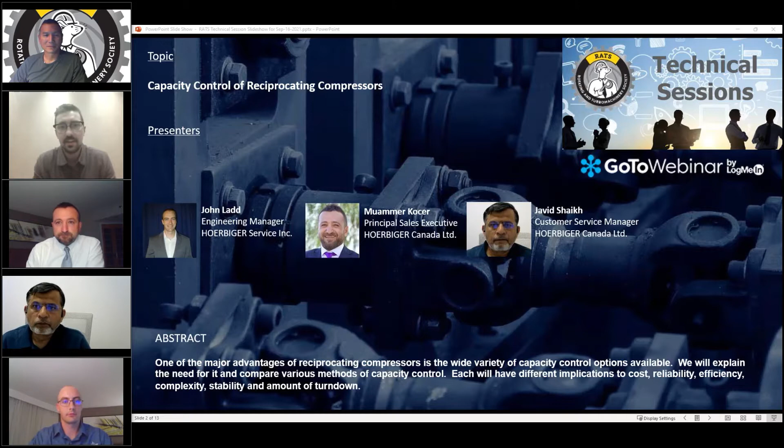Thanks, John. All right, well Javid, thank you very much. Let's see, all right. Is my screen coming through?

To kick off the presentation, just to recap for why we need capacity control on compressors, and some of the working theory behind how they actually move gas. As we all know, reciprocating compressors are positive displacement machines, meaning they will move as much gas as you feed them. And oftentimes the downstream process doesn't require the full capacity of the compressor, so we need a means to turn it down or regulate the amount of flow going to it.

Some additional reasons that we need capacity control on compressors: sometimes we want to save energy, sometimes we want to prevent the driver from exceeding its power limit. This is fairly common in the midstream side of the industry. Then if your suction pressure and your discharge pressures are changing, then obviously your interstage pressures will change, and you need some form of capacity control to keep everything balanced. If you have side streams in your process, it's a very similar reason to needing to balance your interstage pressures. And it's also very common in midstream that you want to keep your driver torque within a fixed band. This is of particular importance when you have a natural gas driver, and they perform best when they are in their ideal torque band.

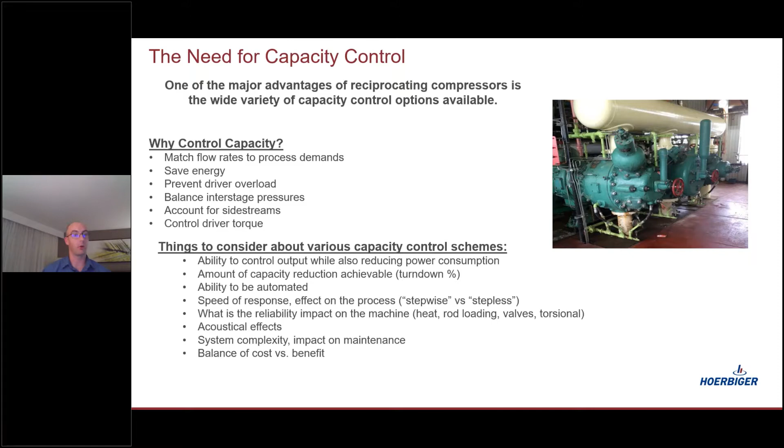So throughout this presentation, we'll go over some things that you should consider over the various capacity control methods. That's the ability to actually turn down the compressor, how much turn down you need, how easy it is to automate a certain type of capacity control, how quickly do you need it to respond, and then what are the reliability impacts of implementing such a system, whether it's heating, the rod loads, the valves, are there any acoustical issues, are there any torsional issues? And then we obviously want a system that is able to do everything we need, but we also don't want it to break the bank.

So we have this slide here just to go over how the mass flow of a compressor is calculated. These are the 4 knobs that we can turn if we want to adjust the flow rate through a cylinder. The first knob that we can turn is adjusting the speed of the compressor. If you speed it up, you're obviously going to pump more gas. If you slow it down, you'll pump less gas.

Then the next term we have is the suction gas density. This is directly proportional to your suction gas pressure. If you have greater suction gas density, it means you have more molecules in the same amount of space. And because these are positive displacement machines, it's going to move those molecules down the line. Then next, you have your swept volume, which is your bore area times your stroke.

And then finally, we have this last term, which is the volumetric efficiency term. All this term means is it is the percentage of the stroke that your suction valves are open. So for this particular PV card we are seeing here, between V2 and V1, that is 100% of your stroke. And from B to C, that is your volumetric efficiency. For this example curve, we're probably looking at 80 to 85% volumetric efficiency. And this term is calculated by these parameters down here: your clearance volume, your compression ratio, and your kappa, also known as the isentropic exponent.

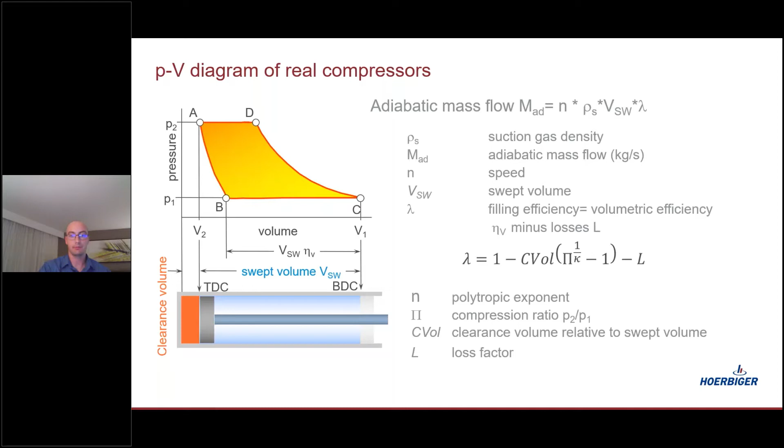As we had touched on in the first slide, one of the reasons for the need for capacity control is we want to make sure our drivers remain within their power limit. This is the formula that we use to calculate the required power. The area inside the PV curve is the work being done on the gas, and this equation here just converts that work into a rate. Once we have the rate of work being done, we are then able to get the power demand.

So P, that's the area within the PV card. L is the length of your stroke. A is your piston area. So the L and the A term is your swept volume. And N is your compressor speed. And then this 33,000 is just a constant, and that gets all these funny units to agree with each other.

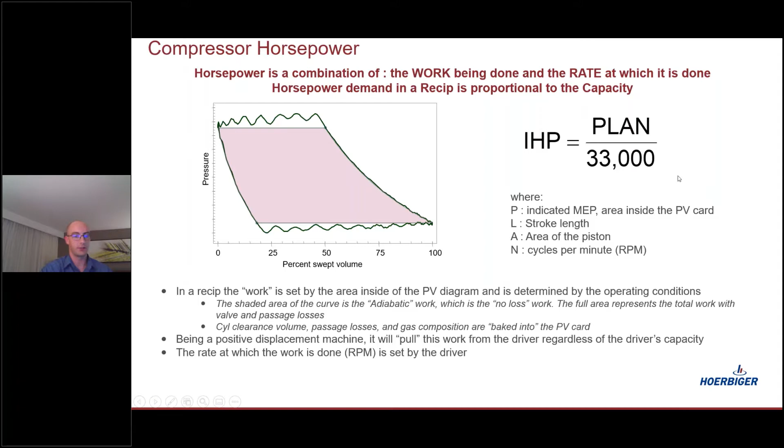Within the world of reciprocating compressor capacity control, there are two main families: stepwise control and stepless capacity control. By stepwise, we mean you have individual load steps. The fewest number of load steps you can have is 2, meaning your compressor can be on or all the way off. From 2, you can have 3, 4, 5, and upwards of 48, if not more, individual load steps. It just depends on how many actuation devices you want to put on your compressor, how many cylinders you have, and the amount of complexity you are willing to tolerate.

The other family of capacity control is stepless capacity control. By stepless, we mean it has an infinite range of capacities, so if your downstream process needs 62.5% of the compressor's flow rate, it will be able to deliver exactly that amount. There are a number of different methods out there to have a stepwise and a stepless capacity control system.

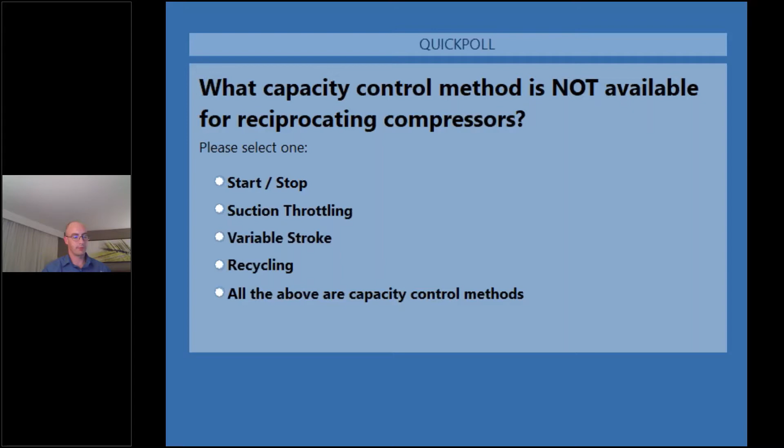Okay, let's take a look here. So 0% on start and stop, 25% suction throttling, 25% variable stroke, 13% recycling, and 38% said all of the above are capacity control methods.

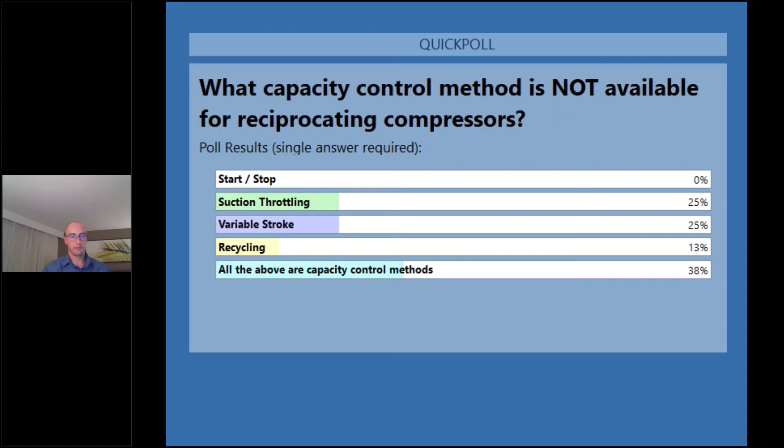Well, so the correct answer was there's no such thing as a variable stroke compressor. The reason for that is the crankshaft is what controls the stroke, and while the compressor is running, that crankshaft has fixed geometry, so we aren't able to adjust the flow through it.

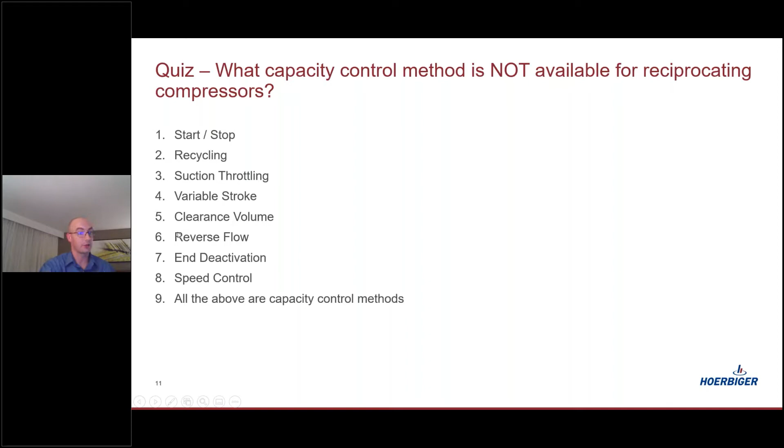Throughout the presentation, we'll go over start-stop control, recycle control, how suction throttling actually works, how you can add or reduce the clearance volume in a cylinder, go over the principles for how reverse flow actuation works, go over cylinder end deactivation and speed control.

We put all these 7 methods on this chart here, showing the 4 parameters that you should consider whenever implementing a capacity control system: the stability of that capacity control system, how much turndown it has, the complexity of implementing such a system, and the efficiency of that system.

To start it off, we'll take a look at the start-stop control. We see that it has very low stability. If you have a 2,000 horsepower compressor and you are starting and stopping it, that will introduce quite a shock to the system. So you'll either pull down your header or pressure up your downstream headers, just from bringing that compressor online and offline.

The start-stop does have fantastic turndown capabilities. Honestly, you can go from full load to 0 load, but there's no intermediate steps. It's very low on the complexity side, you just need the ability to start and stop the compressor with ease. From an efficiency standpoint, when the compressor is offline, it's obviously not consuming any power.

Next is the recycling method. Some people call this the kickback method, the recirc valves, the spillback valve, there's all sorts of names for it. It's a very stable system, a stepless capacity control method, and can have up to 100% turndown. It's not very complex, but the downside is a recycle valve is not very efficient.

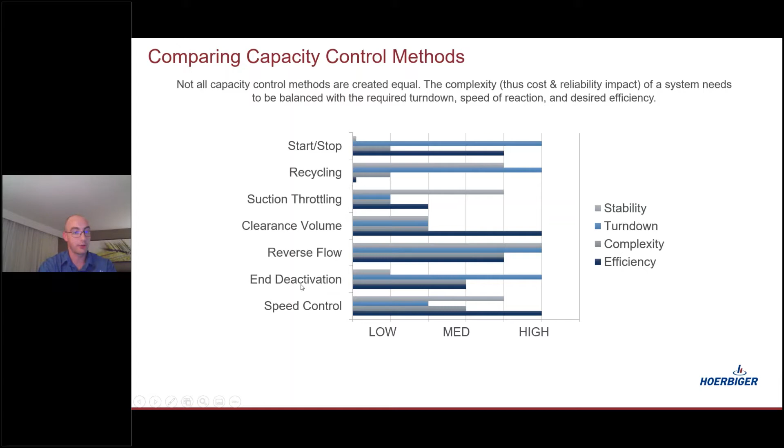The reverse flow actuation type of device, which is what we call our Hydrocom system, is extremely stable. It has a complete turndown range, meaning you go from full load to 0 load. The one downside is it is a fairly complex system, but it is very efficient. And then same story for end deactivation and speed control.

So first we will cover the external methods of capacity control for these compressors. The first method is the spillback control, or the recycle control.

So what this means is that the compressor is at a fixed geometry, meaning it's always going to pump the same amount of gas regardless of what the downstream process needs. So if your downstream process only needs 50% of the compressor's flow rate, it means that 50% of the gas that has been compressed is going to go back through this recycle valve, go back to the suction side, and get recompressed again and again. So as we can see by the simple process flow diagram, it's a very simple system, but it is a very inefficient system because you are continuously doing 100% of the work, regardless of how much gas the downstream process needs.

So if there are any power limitations on the compressor, the spillback valve is not the type of capacity control that can help reduce the power demand effectively.

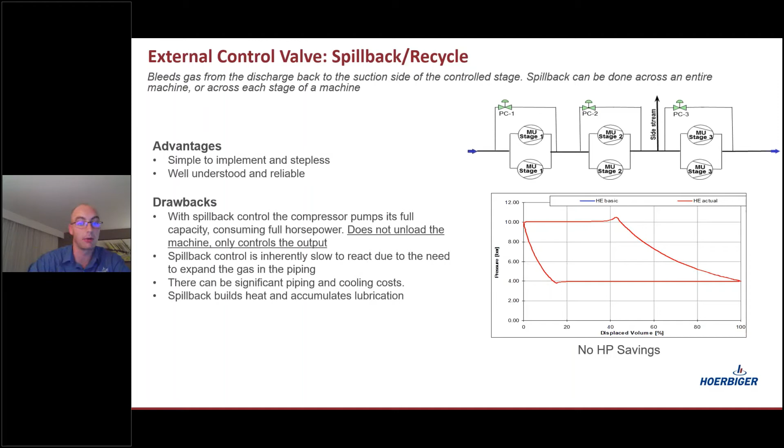Then next is the suction valve throttling method. This is where you allow your suction pressure to increase or decrease depending on the flow demand. If you drop your suction gas pressure, your suction gas density will decrease, which we are seeing on this red curve. By decreasing our suction gas density, we are reducing the amount of molecules that are being pulled into the cylinder. And then the second term that we are affecting in our mass flow equation is we are reducing the volumetric efficiency as well.

So we see on the blue curve, we're probably sitting at an 85% VE. Then on the red curve, we are sitting at probably a 75% VE. So that is another indication that we are pulling less gas into the cylinder. We actually do end up saving a little bit of power doing this, but it is not the most efficient means to reduce the capacity.

The other drawback of using a suction valve throttle is that you increase your compression ratio. And if you increase your compression ratio, then your discharge temperature will also increase.

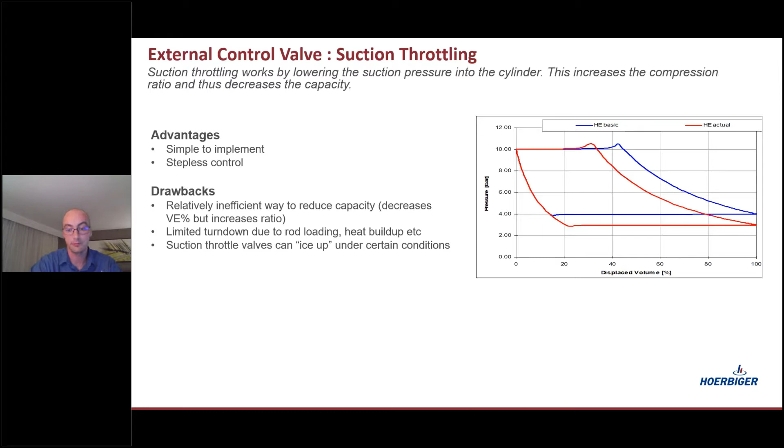So in the downstream world, we don't see very much speed control on reciprocating compressors. Most of these units use a synchronous fixed speed electric motor. So whether it's running at 277 RPM, 300 RPM, 327, 450, whatever that motor is rated for, it's going to continue to spin at that speed, regardless of what the compressor needs.

There are a handful of installations that use a VFD drive. These are very efficient, but the downside of using them is they are extremely expensive and they take up a lot of space. In the midstream side of the world, it is very common for compressors to be driven by a gas engine. These gas engines have a speed range, typically plus or minus 20% of their average speed. So that means you can adjust your capacity by that amount.

The downside of using a variable speed to control the capacity is you may excite a torsional natural frequency in the compressor itself. So oftentimes there are dead bands, meaning you can't run at a certain speed. You have to pass through that band extremely quickly. So it's pseudo stepless, stepless to a point, and then it has to step across that, then it goes back to stepless control.

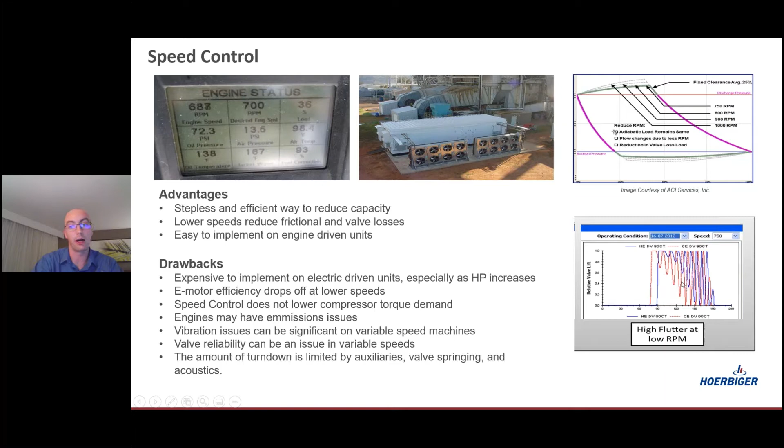All right, so those are the three methods of external capacity control on compressors. If you all have any questions about these systems, please put them in the chat, and we would be happy to address those at the next natural stopping point.

So now we will dive into the capacity control methods that are a part of the compressor itself. The first one is looking at cylinder end deactivation. So we threw a quiz in here just to get an idea of what type of cylinder deactivation y'all's compressors use, whether it's a plug unloader, a suction valve unloader, whether it's finger or needle style. Do you remove the valves when you know you're not going to need capacity for a long period of time? Do you have port unloaders, or do you use a combination of all four of these?

Oh, sorry about that. I've got to get on the ball here.

Okay, so what kind of cylinder deactivation does your compressor use? Please select one: plug unloader, suction valve unloader, finger or needle, valve removal, port unloader, or combination.

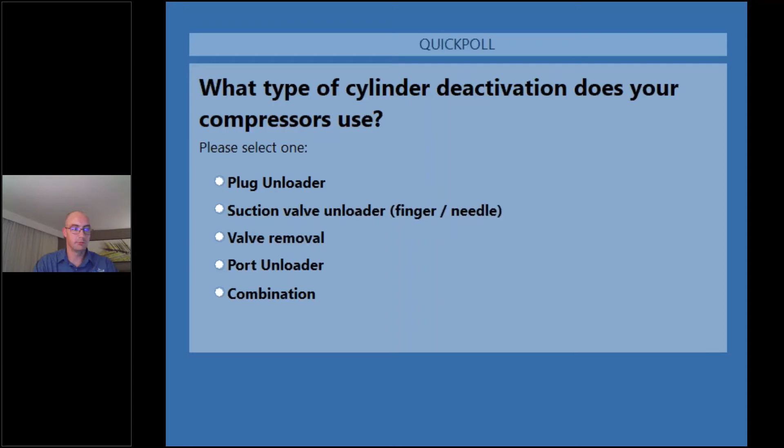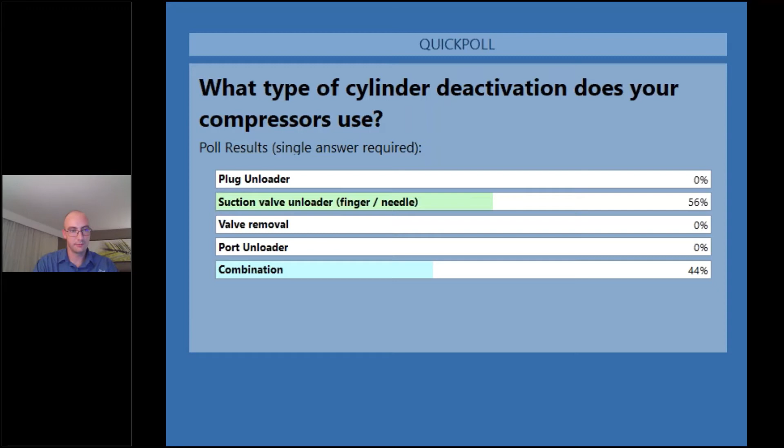So nobody's using plug unloaders, at least on this call anyway. Suction valve unloaders, 56%. Nobody's voted on valve removal or port unloader, and 44% are using a combination. I'd be curious to know what combination you guys are using, feel free to put that in the chat as well. Okay, thank you. Great.

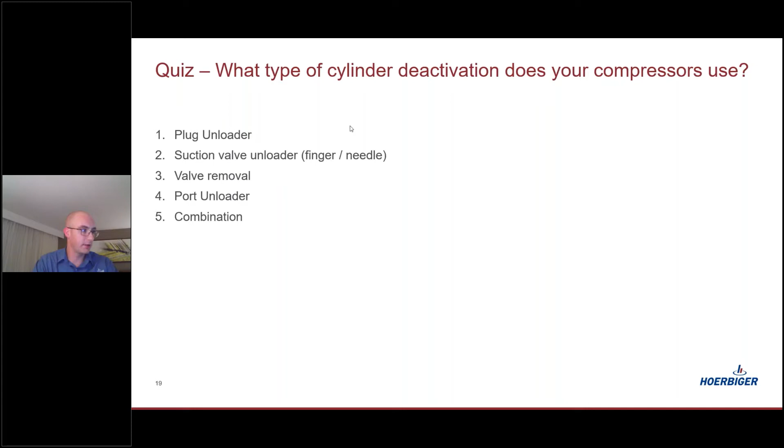Let's move that out of the way. Okay, so now let's dive into the different methods to deactivate the cylinder.

The most common methods out there are to use a plug or a port unloader. These terms are often used interchangeably, but they use the same principle. When the plug is down, it seals this hole, which then prevents gas from flowing back into the suction plenum, allowing the natural compression process to start.

When you have a suction valve with a finger unloader, this is what a typical assembly will look like. You have your actuator on top, bolted onto your valve cover. The cover then pushes on the cage, which then holds the valve in place. This actuator has air pressure on top, and pushes on top of the finger, holding the suction valve in the fully open position.

Here is a snip of a partial valve with a plug unloader. By a partial valve, I mean we have the center of the valve open. That allows the plug to seat on it, sealing the gas inside the chamber, allowing compression to start. Then when the plug is retracted, that port is open, allowing gas to flow freely in and out of the cylinder. So the main benefits of these systems: they're pretty simple to put on a compressor.

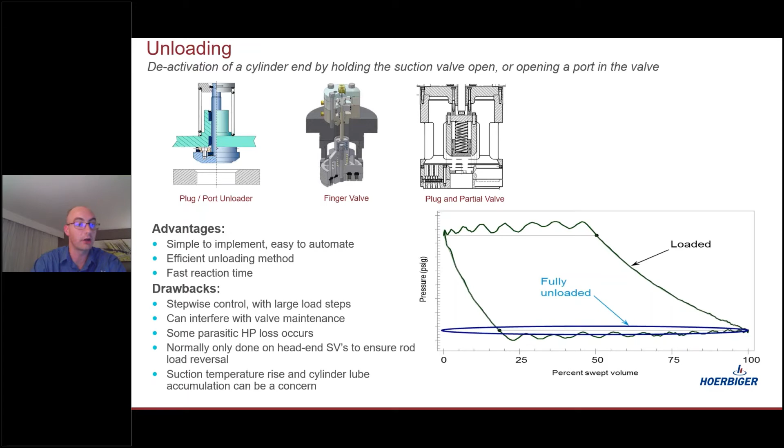It's usually done on the head end side of the cylinder, but it's also very common to have it on the crank end side to assist with the start and stop of the compressor. All right.

So if you have a suction valve with a finger unloader on it, here are some of the design considerations that need to be taken into account. We would need to know the exact operating conditions for that particular compressor, because that will dictate how much backflow force is going across the valve trying to close it.

Because as gas flows from inside the cylinder back to the plenum, there is drag force on the plate or ring or poppet trying to close it, and then your finger or needle assembly is needed to help hold it open. All that back force often tries to bend the plate or the ring or the poppet, and we just need to make sure that the sealing element is strong enough to handle that back force.

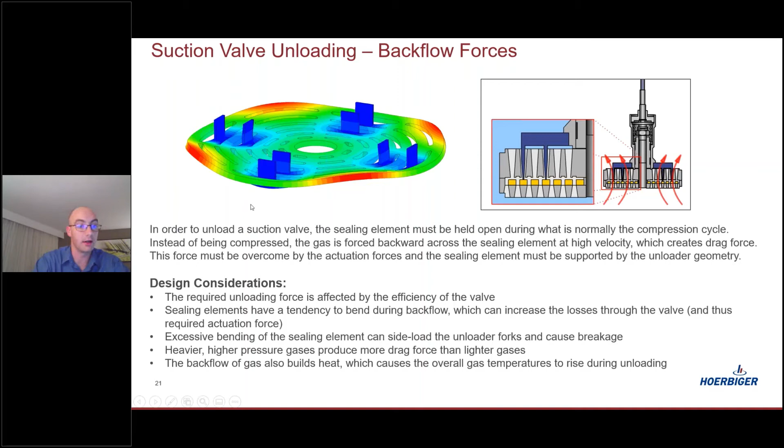We also need to ensure that the fingers are strong enough to be able to hold it down and not be at risk of damage. All right.

So within the world of actuators, there are several different styles out there. On the left-hand side is a stacked piston actuator. The air is delivered on top of this actuator. The air then pushes on top of these pistons, which then pushes the rod down, pushing the finger, holding the finger in the fully open position. This is what we call an air-to-unload style of actuator.

Next there is a diaphragm style, very similar in working principle to the piston. You have air delivered on top. It then works and pressurizes the diaphragm, pushing the rod down, putting the valve in the unload position.

Next is a reverse acting style of actuator, used on suction valves with finger unloader, except it uses a spring force to hold the valve in the fully open position. You deliver air on the backside to counteract that spring force, allowing the suction valve to open and close as a normal suction valve.

Here is a snip of a typical example of a plug unloader, where you deliver air on top, air then presses on the piston, then connects to the rod, and the rod then holds the plug down in the loaded position. This drawing here is actually the top end of this plug unloader. The air pushes down and holds the plug in place, allowing the normal compression process to start.

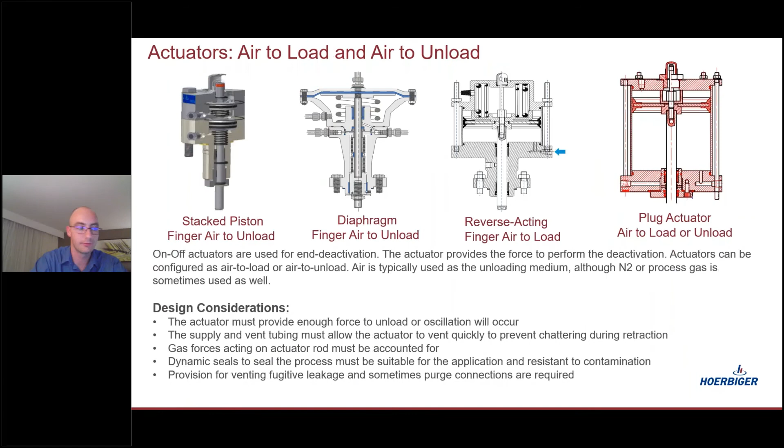For the different types of unloaders out there, you have your plug unloader, which can be used on plate, ring, and poppet valves. Here's your finger style unloader used on plate and ring styles. Here's your pin or needle style that's solely used on poppet valves. And then this unique contraption is a radial poppet valve unloader.

Although these do work, they do become a maintenance headache because it is very difficult to get these poppets clocked in the correct position. So they are very prone to leakage, and it's a giant chunk of metal to be putting in and pulling out of a compressor.

Some of the design considerations, I won't read these for you since y'all will have this presentation for your records. But the key takeaway is you just want to make sure that the material you choose for your unloading device is suitable for the gas that it will be operating in. And we want to make sure that it is designed with adequate strength, so that way we don't see any premature failures.

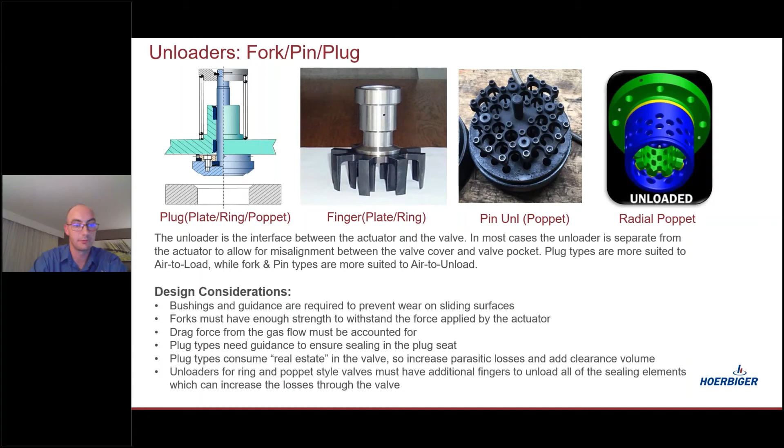So these are the different types of reverse flow control actuators out there. This is a hydraulic system. This is an electric system, which works on the principle of electromagnets. Then here is a hydraulic system, and then here is another hydraulic system. These two in the middle are both HOERBIGER products.

This is the eHydrocom system. It's got two banks of electromagnets that you apply a high voltage to. That voltage then pulls on two magnetic plates, and it works on the same principle as the traditional hydraulic version, which regulates the opening and closing of the suction valves.

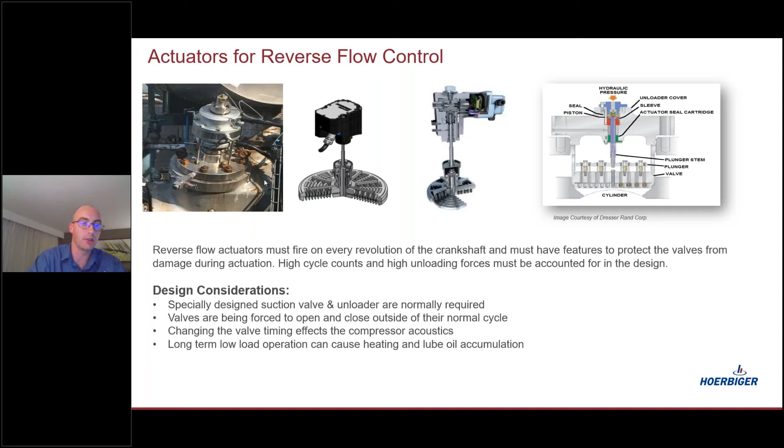We have this chart here going over how it works, but I figure it's way easier to see how it actually works with an animation.

So this is how the hydraulic system works. Right now the compressor is at full load. Here we are at top dead center. Once you are at top dead center, you start backstroke, starting the re-expansion process. Then your suction valves open, you are pulling gas into the chamber until bottom dead center. This is where your suction valves close, and then you restart the compression process. Once you hit this point, your discharge valves open and flow starts moving down the line.

So how this reverse flow actuation device works is it actually controls when the suction valve will close. Once again, we'll start at top dead center, follow the same re-expansion path, follow the same intake path where you get to bottom dead center, except we see that there is hydraulic pressure being delivered to the top of the actuator, holding the suction valve in the open position, allowing gas to escape back into the suction plenum. It then does that until a prescribed time where the hydraulic pressure is released, allowing the suction valve to close, and then the compression process begins, giving you a reduced quantity of gas being discharged. This happens every single cycle of the compressor, allowing you to finely tune the capacity of the unit.

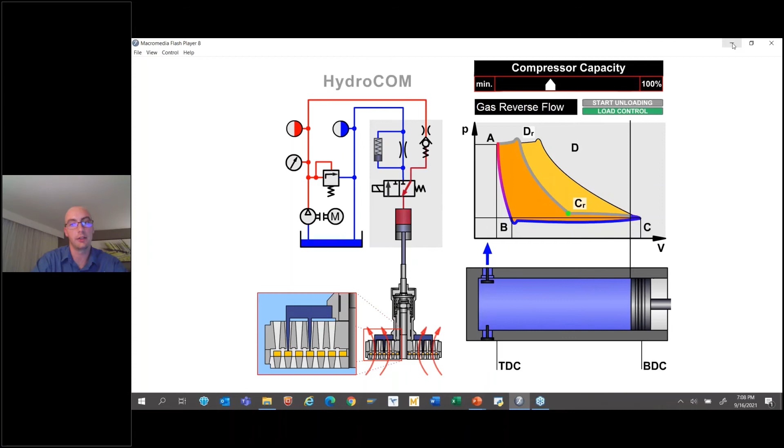Before going on to the typical unloading problems we see, are there any questions about cylinder end deactivation?

Well, we don't see any questions come in at all, but that animation was amazing. I've honestly never really seen the operation of the HydroCOM, and that was great. If there's no questions throughout the presentation, definitely interested in getting them for the end. So just keep your thinking caps on. We've got a poll coming up soon.

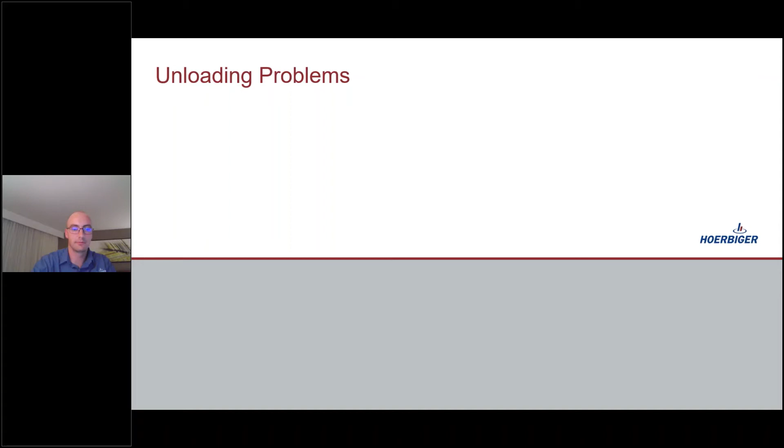What are the common unloader problems? Select all that apply: plug/valve leaking, getting stuck in loaded or unloaded position, component failures. This is a multiple answer, multiple choice question.

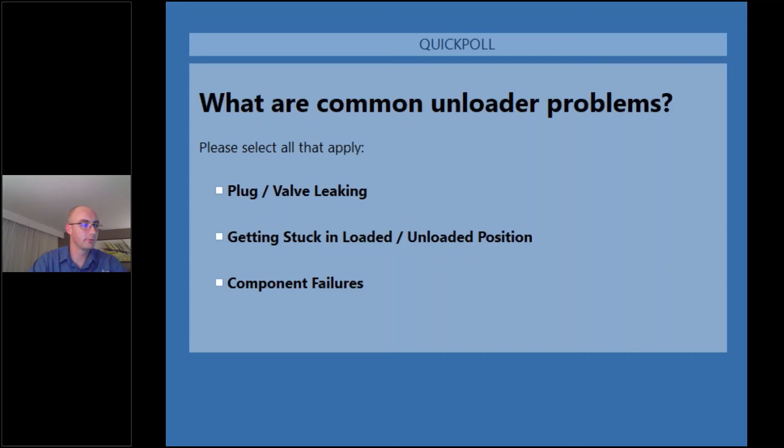Let's see what the percentages are: 80% plug and valve leaking, 60% getting stuck in loaded or unloaded position, and 70% component failures.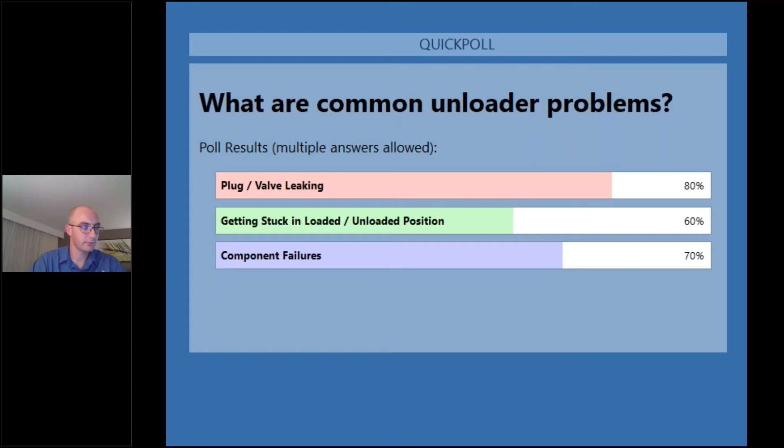It's very common to see all three of those. That was more just to gauge what the biggest pain points are on your on-off unloading systems. Whether it is a plug unloader or a finger unloader, it's very common to suffer from insufficient actuation pressure, meaning there is not enough air to keep the finger or the plug in the down position. When this happens, as gas is backflowing across the finger, it overpowers the available unloading force, causing the finger to lift up. Then it gets a little bit of pressure, closes down, opens up, closes down, opens up, closes down.

By doing that, you will often see damage on the fingers themselves, the plates, rings. If this is happening on a plug unloader, you'll see a lot of wear on the plug as well as the plug seat. And then you may see some damage on the top of the unloader rod or on top of the finger unloader assembly.

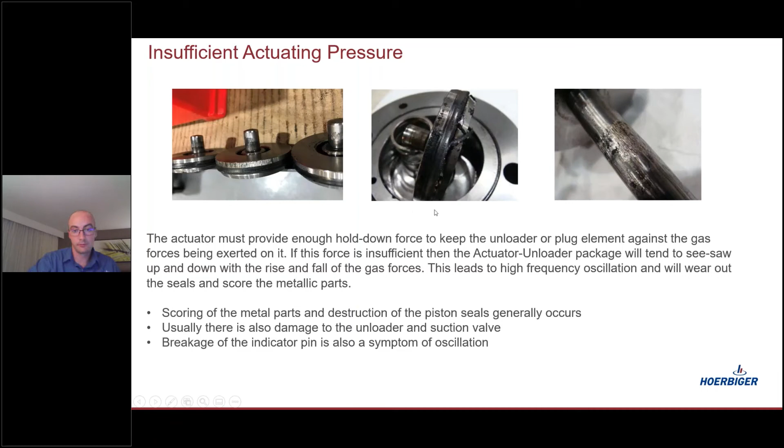Here is an extreme example where the plant had an ample amount of plant air, and in doing so they were putting an excessive amount of air pressure on the finger unloaders. I can't remember exactly, but for this case they were putting like 200, 250 PSI of shop air on the unloading actuator. These unloading actuators are typically designed for 70 to 100 PSI, so they were dramatically exceeding the design factors, and we can see damage on the plates themselves where the fingers will indent into the softer plastic plate material.

If the unloading force is truly excessive, you may buckle the fingers and they will snap off like that, or you may see some damage on these unloader caps as well.

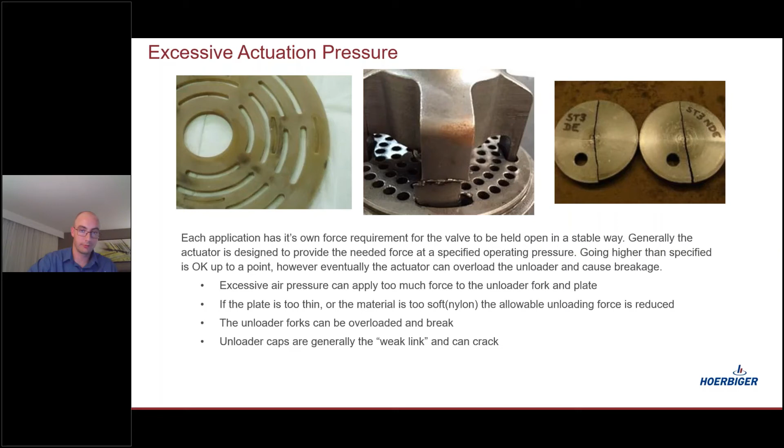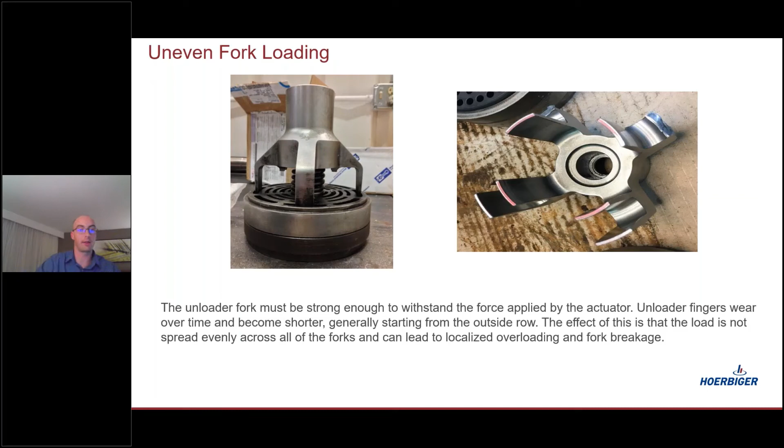This is of particular concern with a finger unloader or needle unloader: you want all your fingers or needles to be on the same plane, meaning you don't want your unloader cocked in the valve or with one leg longer than the other, because that longest leg will press hardest on the valve. That side of the valve will see the most unloading force, and the other side of the plate or ring will flutter back and forth. In doing that, it can damage the plate or ring, or it can also damage the shorter fingers because that side of the plate is continuously whipping back and forth and impacting on it.

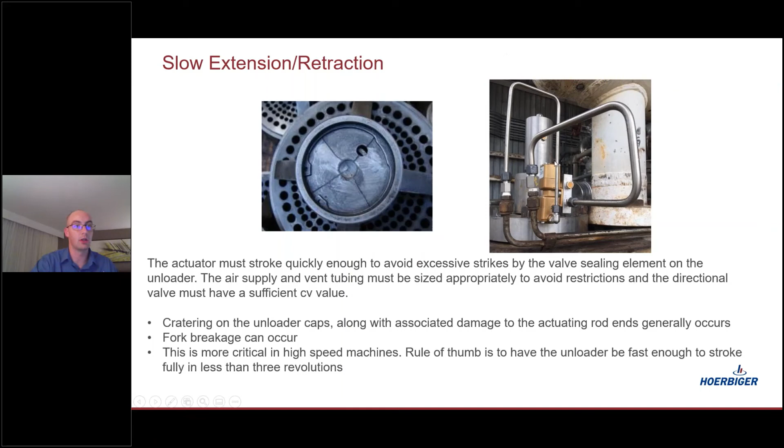Here is an example of what happens if you don't have a quick exhaust valve on the unloading actuators, meaning it traps the supply air inside the actuator and it leaks out very slowly. In doing so, the unloader cap or the unloader rod is retracting very slowly, and it's often getting beat up along the way, and you'll see indentation on your caps like this. You'll see damage on your plug seats. All sorts of problems can be tied back to slow extension or retraction of the actuators.

Here is an extreme example of a plug that has been heavily abused in the field. This is surprisingly common to see because these are heavy devices to pull on and off the compressor. They're often left on the deck while the valves, pistons, and packing are sent to the repair facility, so they don't get a lot of love and attention.

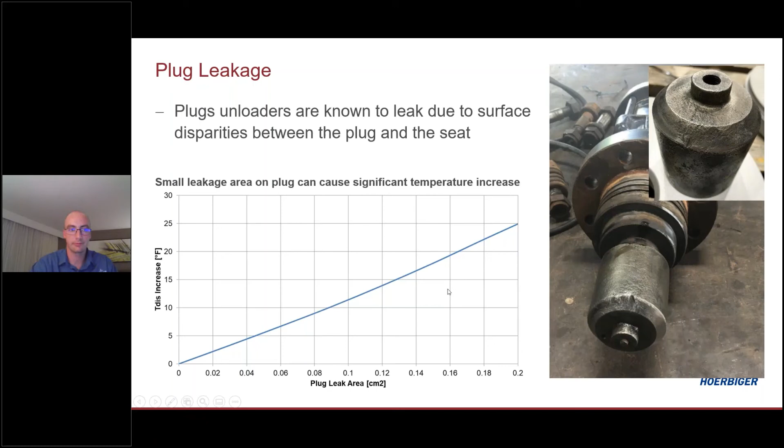As these plugs and plug seats get damaged, you introduce a leak path, and this leak path can result in a dramatic increase in the discharge temperature on the compressor. Even a tiny effective flow area leakage, about 0.1 square centimeters - if you hold your four fingers together and form that little square, that's about 0.1 square centimeters - that small amount of leakage can result in greater than 10 degrees of discharge temperature increase when you have a high kappa gas, typically a gas with a lot of H2 in it. It's fairly common with nitrogen in it as well.

A common complaint we hear from end users is that they experience elevated temperatures when running unloaded for a prolonged period of time. This is just a theory that explains why that is.

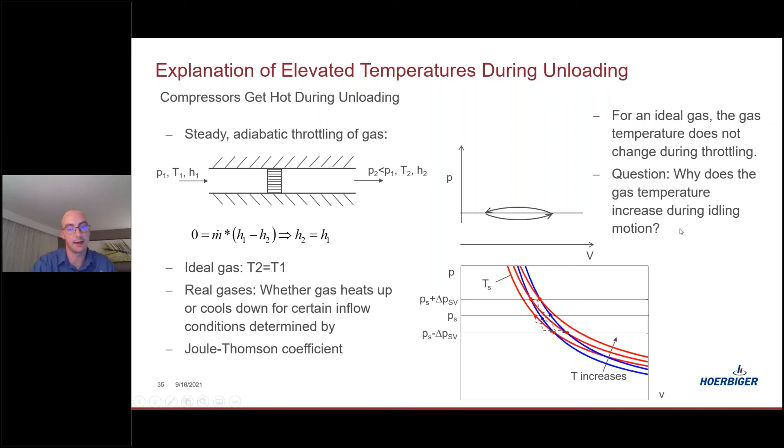Going back to that extreme example of damage on a plug, there are several wear parts in these actuators that need to be serviced regularly. There are seals down on the rods on both styles of actuators. These seals need to be serviced to reduce process gas leakage, either going up into the actuator or leaking out onto the compressor deck. There are also seals on the pistons, and we need to ensure these piston seals are in good working order, otherwise you'll get blow-by across them, and the actuator won't function as it should.

If these actuators have been just thrown on a deck and the rods get damaged, it's possible for them to get bound up, which could contribute to them getting stuck in the loaded or unloaded position. If you have a dirty gas, it's very common for that sticky gas to work its way into these little cracks and crevices, and then it's very common for these to get stuck in the up or down position. The same can be true for this style of actuator as well.

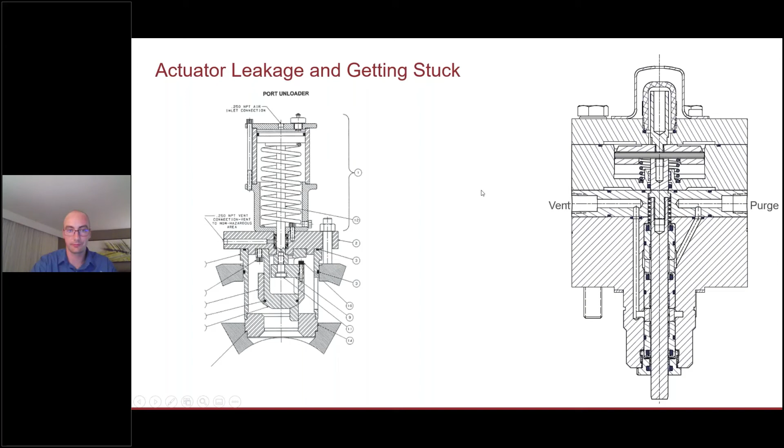All right. Here are some unique methods for cylinder end deactivation. This one has a plug valve that plumbs into the head end of the cylinder and then recirculates back to the pulsation bottle. This system is extremely efficient, but as you can imagine, it's very costly to implement.

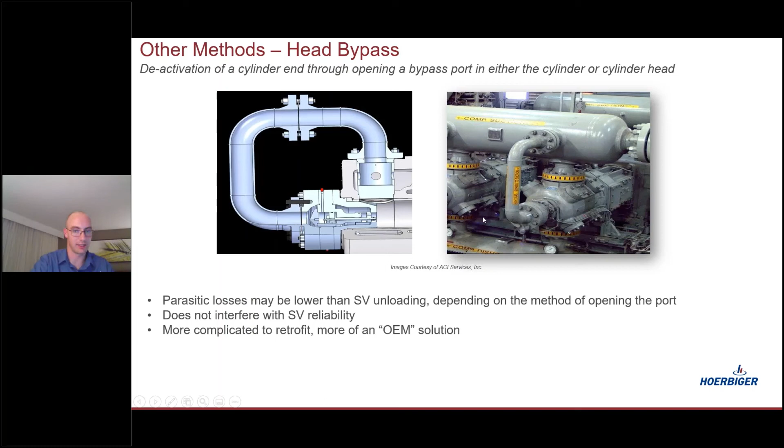If you know your compressor is only going to need 50% of its capacity for an extended period of time, it's fairly common to just remove the head end suction valve, which does the same thing as a cylinder end deactivation, except you have less suction gas throttling back and forth, so then you experience less heating.

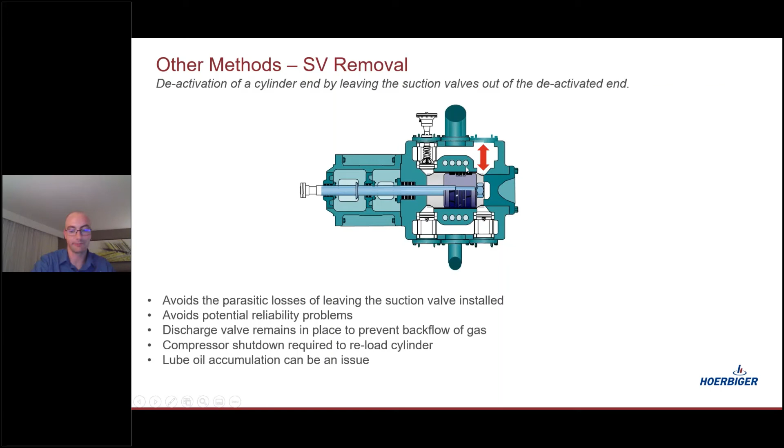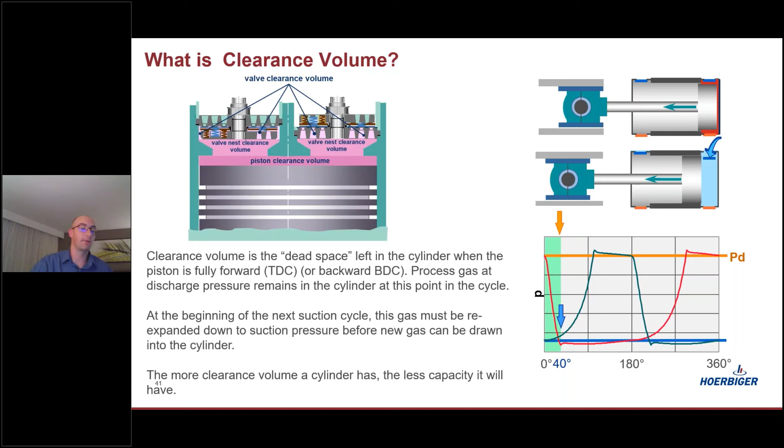All right. For clearance volume control, this is where you add or reduce the amount of dead volume at top dead center in the process. You can do that either by having a fixed volume pocket or a variable volume clearance pocket. This slide goes over the impact of adding clearance volume to different compression ratio processes.

We see that if you have a low compression ratio, it will have a relatively low impact, or a low amount of turndown, at reducing the capacity. For this example, a compression ratio of 1.5: when you add 15% additional clearance volume, you're only reducing capacity by 6%. But if you add the same amount of clearance volume to a higher compression ratio, 2.5, that turndown jumps to 12%. This relates back to the mass flow equations for reciprocating compressors, where it's clearance volume multiplied by the compression ratio to the 1 over kappa. So if you have a small clearance volume, you get a small amount of turndown. If you have a high compression ratio, then that clearance volume has a greater impact.

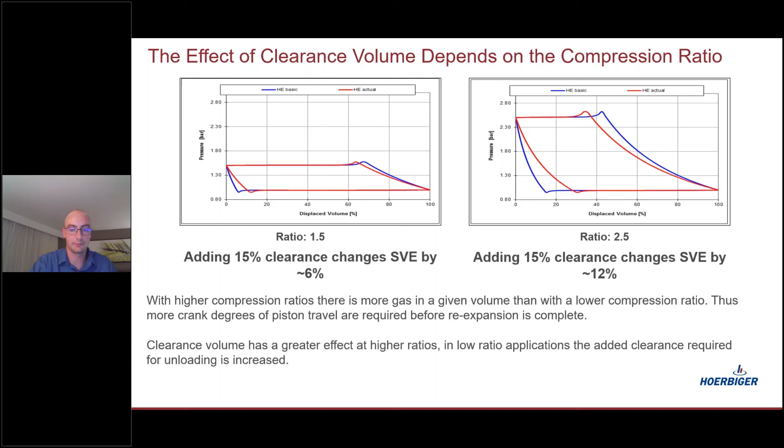All right, so here's a breakdown of a fixed volume clearance pocket. It's exactly what it sounds like: fixed volume, either all the way open or all the way closed. These can be an on-off plug style, like what we see on this bell style of volume pocket. It can be on the cylinder ends, or it can be a manual pocket where you unscrew the plug there, allowing the compressor to access this volume. The main benefit of these systems is they are extremely efficient, but the downside is their effectiveness is highly dependent on the conditions the compressor is running in.

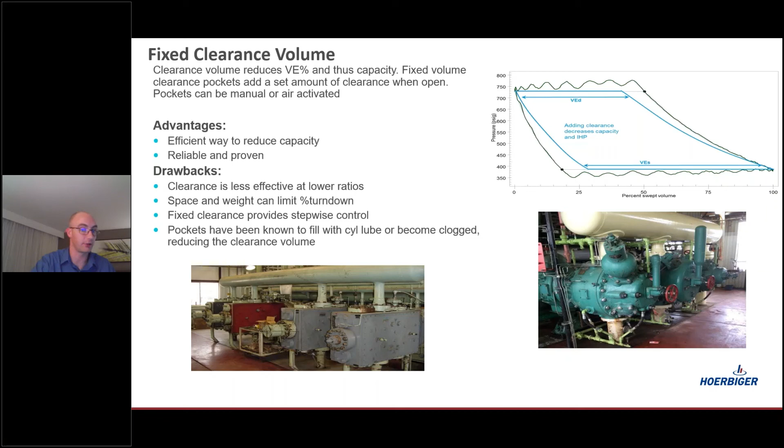Here's some examples of what these fixed clearance pockets can look like. Here's the inside of what that bell style looks like. It goes on a suction valve pocket, and this plug opens up and down on the compressor to access this internal volume. Here's an example of a volume pocket, and it's on a partial valve as well.

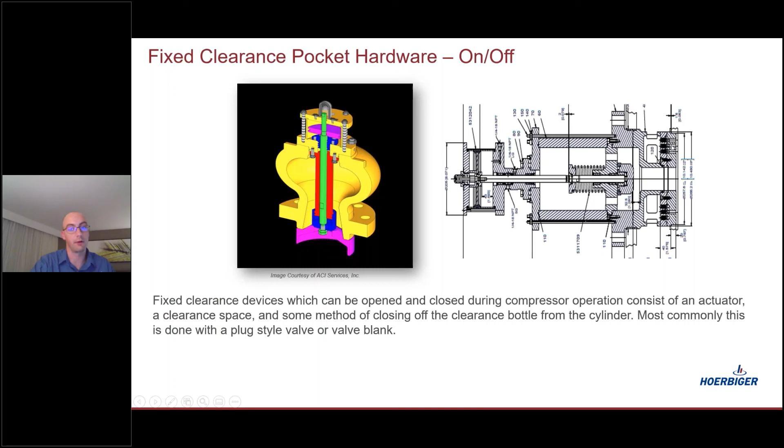And here are some unique methods to add clearance volume. These are very difficult to do, and are impossible to do while the compressor is online. You can add a spacer, which moves the valve up and away from the cylinder body, adding clearance volume there. Some compressor OEMs design their pistons to be reversible, meaning you can change your piston half around, giving you some clearance volume. Using a head spacer is also fairly common.

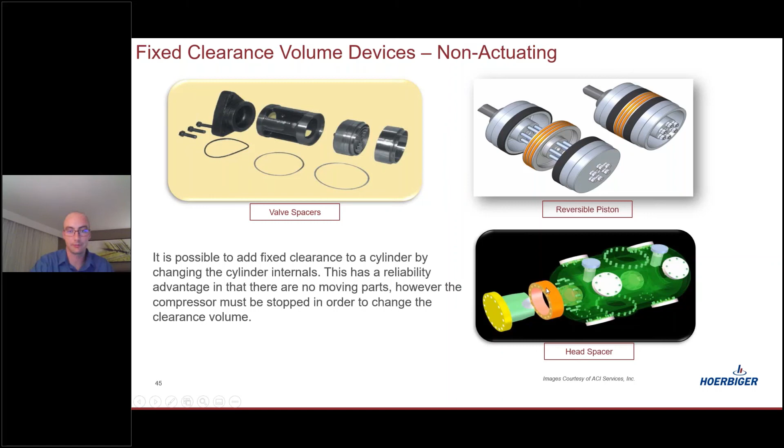This is just a cautionary note: if you are changing the bore on your compressor, you'll also be changing the clearance volume. The reason is in all your valve ports on the liner, there's some clearance volume. So if you make a thicker liner, you're adding clearance volume while reducing the bore, and you need to factor that in and how it will impact the throughput of the compressor.

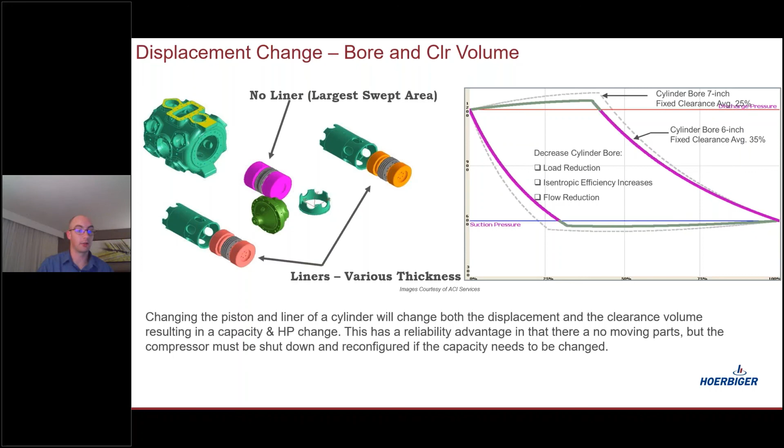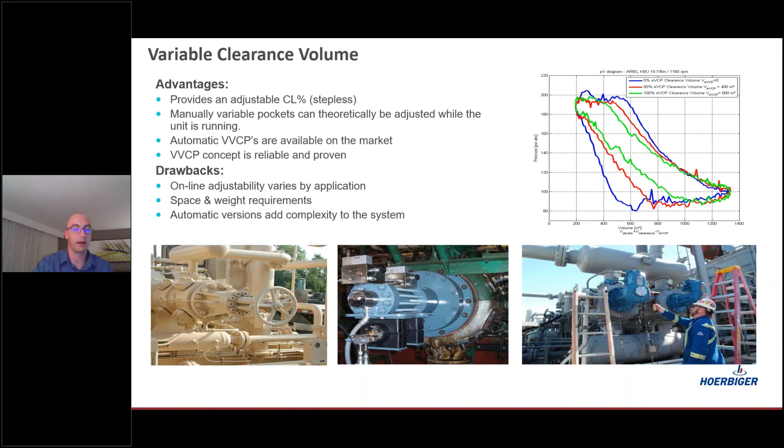These two systems on the right-hand side can be fully automated by the plant DCS and allow you to have a stepless amount of gas control over a finite range of turn down. Here are some additional graphics for how these work. They all work on a very similar principle to this cutaway here—it's just that you're changing the mode or method of moving this piston in and out.

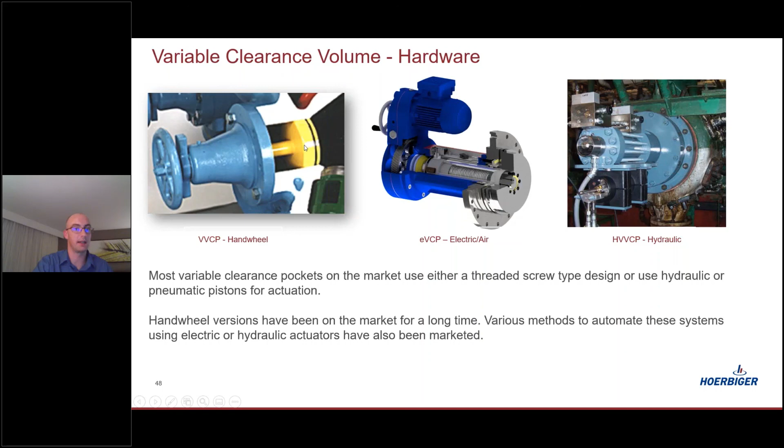For that last section, I tried to speed it up to be respectful of everyone's time. So we'll end with this final slide and just ask everyone how many unloading devices they see on this compressor.

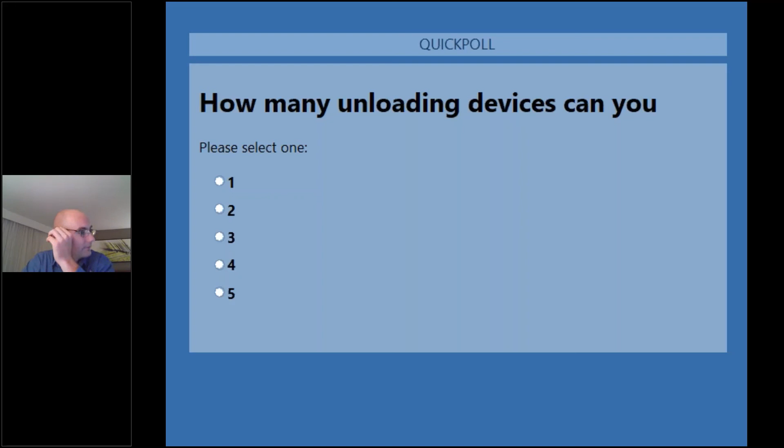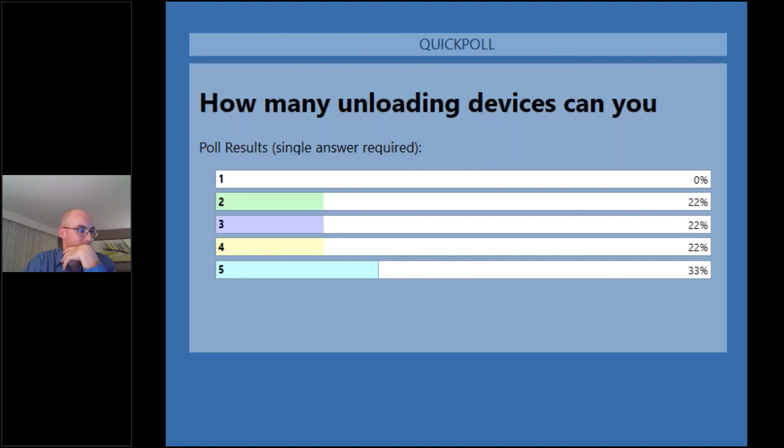Okay, we're going to shut down the poll now and see what it says. So, 0% say there's 1, 22% say there's 2, 22% for 3, 22% for 4, and lastly 33% said there are 5. So what is the magic number?

There are 3 different types of capacity control on this particular example: variable volume clearance control, on-off control or cylinder end deactivation, and—it's kind of hard to tell—since this is on an integral compressor, you also have speed control. For the total number of capacity control devices, you have 9 that you can see in this picture.

So the 3 different types, but 9 individual devices... yeah, okay, I apologize. Our poll didn't translate over because we'd only had choice up to 5, and we just truncated it. So 9 is the right answer.